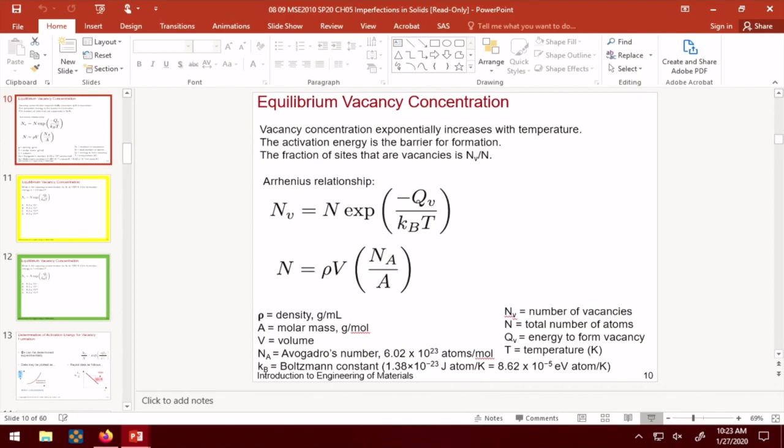All right. Will the pen work today is probably the most unanswered question. But fear not, I brought backup, for I anticipated that there might be a monitor gremlin that refuses. I guess when you passive-aggressively threaten the gremlin enough, it actually does work.

Okay, so we've gone over last time in great detail how to solve for vacancy concentration. Your homework also asks you to actually calculate how many total sites there are. So there will be a tutorial video going up on how to actually calculate the total number of sites. There's also been a tutorial video posted regarding how to manipulate the different conversions between atomic percent and weight percent. That's the majority of our discussion today, because when we talk about imperfections, we typically talk about...

Depending on which scenario you're in, if you're mixing the material, we typically report those numbers in weight percent because it's convenient, right? How much phosphorus should I add into silicon to make this microchip work? It's much easier to have somebody just weigh it out. Stoichiometrically, when we're discussing composition, we want to be talking in terms of atomic percent. Is it silicon 0.99, phosphorus 0.01, right? That's atomic percent.

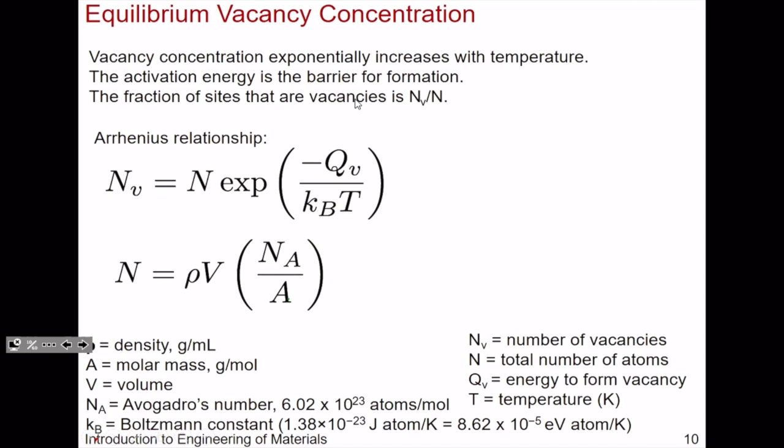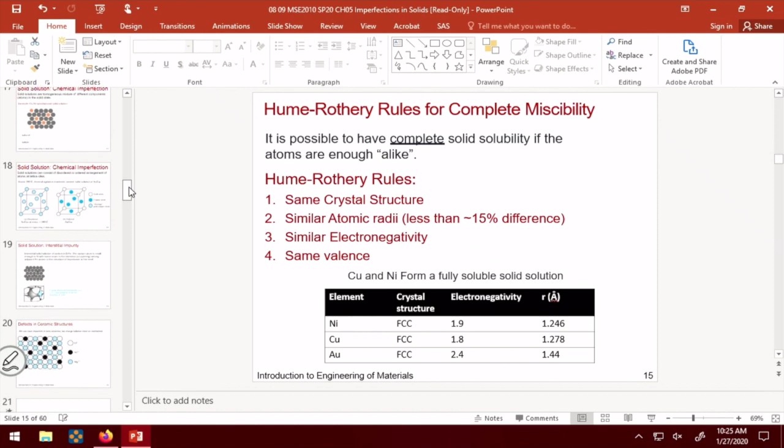So depending on the scenario, we talk about atomic percent when it's convenient for us, or when we're dealing with the actual mixtures physically executing the work, it's more convenient to deal with weight percent. And so chapter 5 deals with that, and there are two equations that just go back and forth. So this is where we left off last time. I want to jump to that before I come back to the Hume-Rothery rules.

We're going to build up to this point where we can go back and forth between talking about weight percent, denoted as C, and atomic percent, denoted as C prime. This may be confusing whether you're talking about C or C prime, but that is the notation. Sometimes I'll write C or C prime, and sometimes I'll just write out weight percent, WT percent, or AT percent. This is what we're going to work up to today.

Then we'll go through a problem about average densities, because when you mix things, inevitably you're going to get some weighted average. We've talked about weighted averages in regards to polymers and how you don't always have the same number of chain lengths in a polymer mixture, right? You always have a distribution. So we've already addressed weighted averages, and now we're going to extend that to talking about molar mass and average densities, which will wrap up our discussion on imperfections in solids.

So let's get us there.

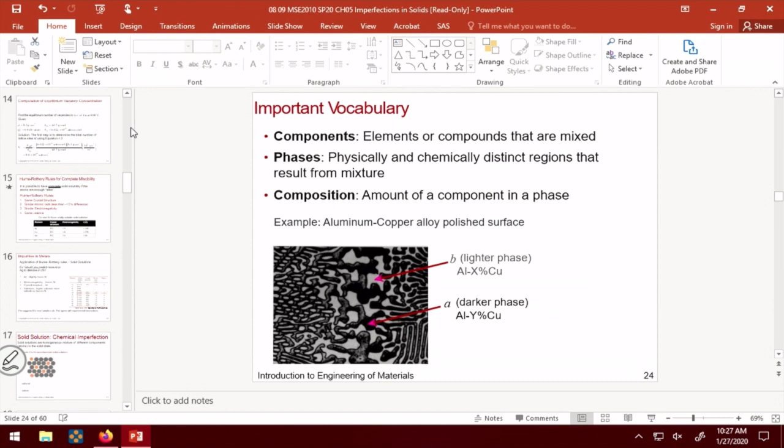The problem we left off with was talking about vacancy concentration in a metal system at 1,000 Kelvin versus at 298 Kelvin—some elevated temperature versus room temperature. We talked about how there could be some ridiculously high concentration of vacancies because it's thermally activated. So at higher temperatures, you're going to have immensely more vacancies than if you were at room temperature.

It's thermally activated—the more energy you put into the system, the more you induce atom hopping. Atoms are now able to vibrate a whole lot more, and they can have enough energy to hop to another site. They can keep on hopping to the point where they hop to the edge of the material, and that can actually expand your lattice constant quite a bit, both due to thermal expansion and due to vacancies being generated.

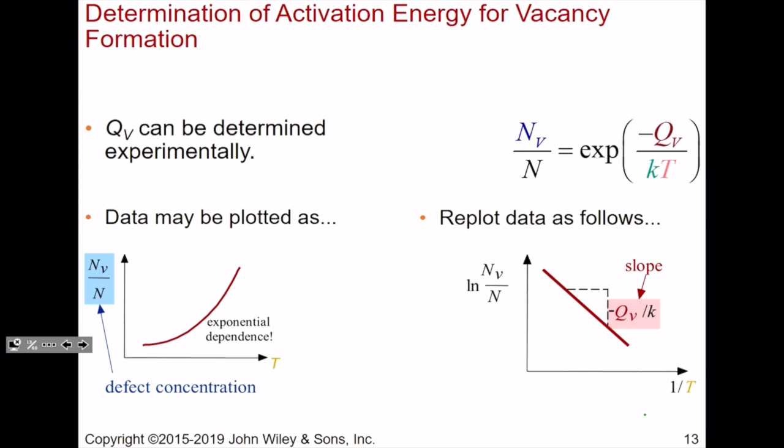So that's where we left off last time—appreciating the thermal activation processes of vacancy formation and the Arrhenius equation, and manipulating the Arrhenius equation.

So then we continue and say, okay, what if we're not dealing with a single component, like the simple examples of just copper or just nickel having a vacancy, or a self-interstitial where you move an atom to a non-crystallographic site? What happens when you have a second component? Sometimes it's an unwanted second component, whether it be a smaller atom or a same-size atom—that's an impurity. Sometimes you want that because you're trying to engineer an alloy with, say, higher yield strength—you're targeting some solid solution.

In everyday nomenclature, we first think of a solution as some liquid form, where you add salt in water, sugar in water. These are the typical solutions we think of, but we can also have solid solutions in which everything is in the solid form. So when you have mixtures of, say, copper atoms and nickel atoms, those will form a solid solution.

You can mix in a little bit of powder of nickel, a little bit of powder of copper, or two ingots, increase the temperature, and melt it all together. But how can you predict if something will form a solid solution?

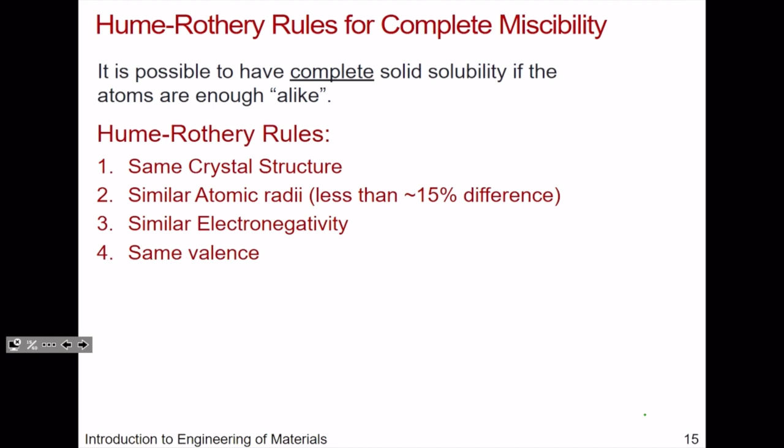Think about a chair, right? If you're wanting to occupy some space, and you're trying to put some radii that's much bigger than the space that you have, that's going to be more difficult, right? So these are the guiding principles that will work for most solid solutions. Of course, we're not going to throw you a curveball and say something that obviously does not satisfy these rules and expect you to know them, right? So keep that in mind. There are always exceptions to the rules, but we'll talk about the cases that do work to begin with.

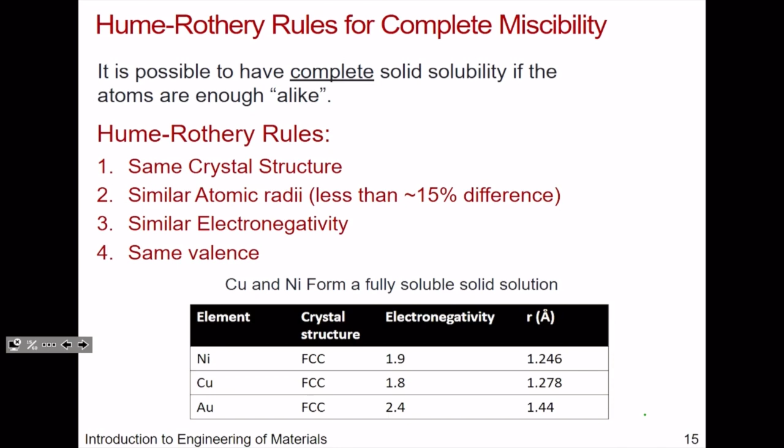Okay, so this was the example, nickel and copper. If you think about copper and gold, they do form, but in different stoichiometries than, say, 1:1. We'll go into an example in the next slide regarding that. The electronegativity between copper and gold, say 1.8 and 2.4, similar, but obviously less similar than that of nickel. So nickel is going to more readily go into a matrix of copper than, say, gold would. But that's not to say that gold-copper solid solution couldn't form, and it actually does.

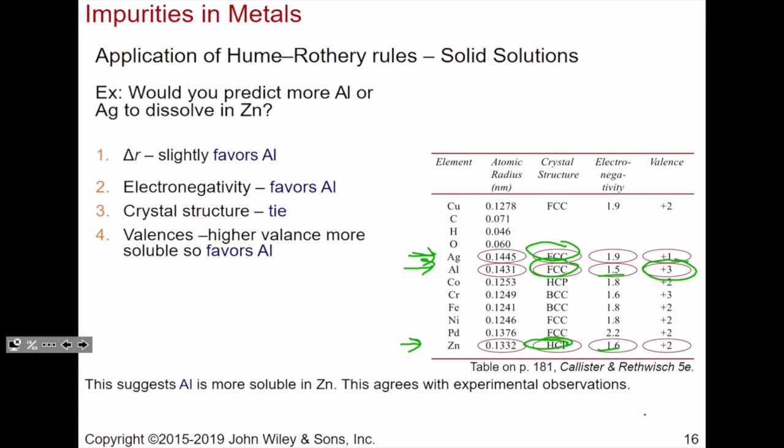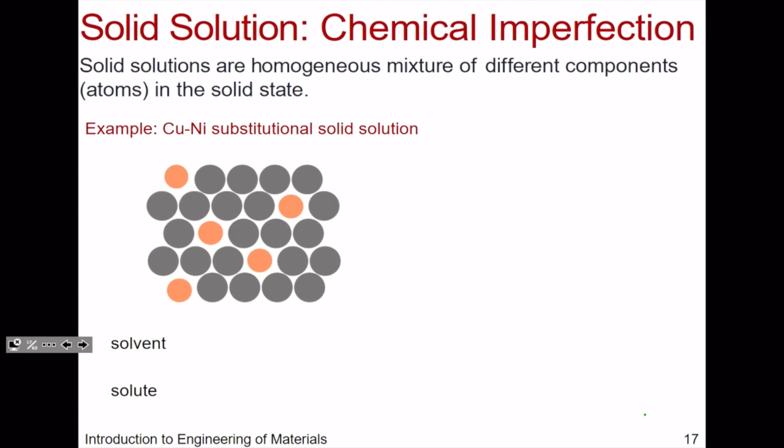I've also talked about gold and copper, and depending on the temperature, it can form what's called a disordered system where you have an average position. Could copper sit here, or could gold sit at the equivalent site? We don't know—it mixes around, so it doesn't matter. From one unit cell to the next, it could change a little bit. So the average position is that a quarter of your sites are gold, and three out of four are copper.

That's what's called a disordered system, where there's an average site and no preference as to which site it occupies. Below a certain temperature, for this particular system, you have what's called an ordered phase—meaning there are actually preferred crystallographic sites. Below 390 C, copper prefers to be at the faces, and gold prefers to be at the corners in this particular system. Now, if you shift it all, it's still equivalent, but that just means if one is at the faces, it's always at the faces, and if one is at the corners, it's always at the corners—they're interchangeable. But there's a preferred site, and that's what we mean by an ordered system.

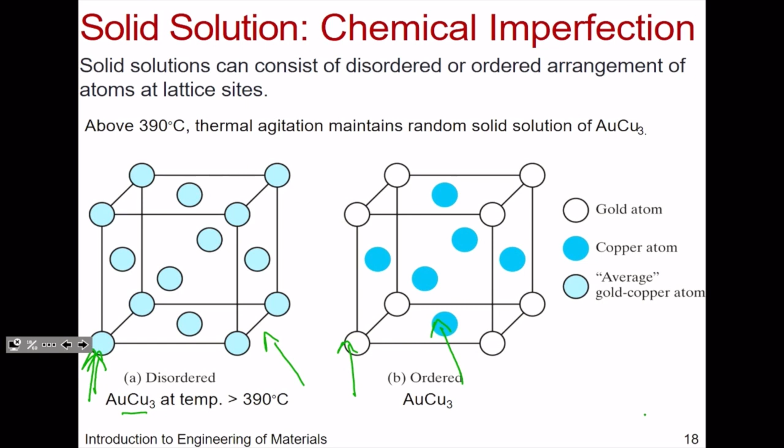There are more atoms in terms of the number once you add up the fractions? So if copper is at the faces, what's the equivalent volume of an atom at a face? Okay, so you got it. You're not just counting atoms, you're counting fractional occupancy, so you do the math again. Okay, glad I cleared that up in case you were confused.

Okay, so let's go to interstitials. This is a beloved system by every material scientist because this dictated the Industrial Revolution. For many years, if you went through a material science class, you'd just be given the iron-carbon phase diagram, and for 50 minutes you'd draw every single phase from memory at every single composition. Because this material dictated industry—a lot of materials are built with steel. There are entire classes dedicated to steel; we're only going to have four lectures on it. But why is it important?

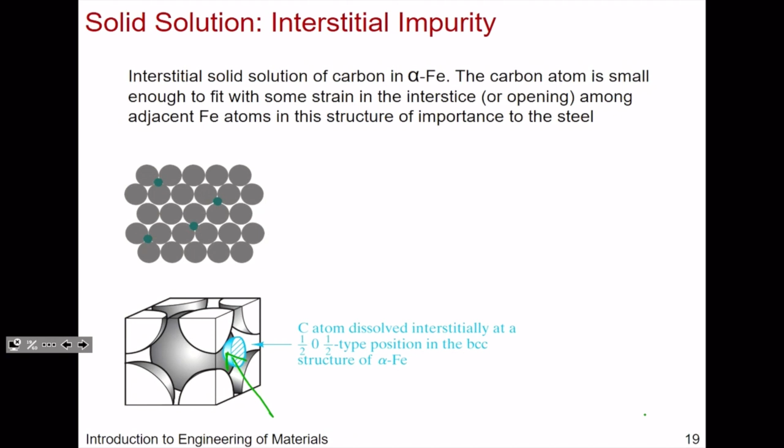It's important because you can put a carbon atom into the interstitial, and this absolutely dictates mechanical properties, corrosion resistance, chemical stability, all of that. Over the years we've learned if we add chromium, we get stainless steel, which has higher corrosion resistance than regular steel. We give up maybe a little strength in some areas, but corrosion resistance is more important sometimes. So the interstitial, even though it's a tiny atom, absolutely changes the landscape in terms of mechanical properties.

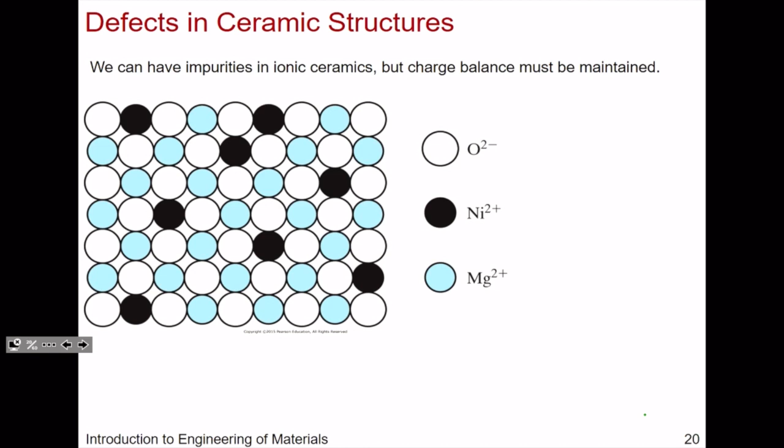Okay, we talked a lot about metals—let's talk about ceramics. Can we put a cation to substitute another cation? Yes. Similarly, can we substitute an anion with another anion? Also yes. Here's an example of magnesium oxide with some nickel 2+ in place of where magnesium was. Fine—you've achieved what's called electroneutrality, meaning you have not changed the charge balance. This is important because everything adds up to zero, and all is dandy.

When things are not neutral, it looks something like this. So if you have sodium chloride, your cation is 1+, your anion is 1-.

In the PDF that was uploaded, it was missing an extra half plane, so please add the extra atoms in there. If you count all the charges, sodium is in blue, chloride is in green. Let's count: sodium should be 1 through 9, and chlorides is also 1 through 9.

Charge neutrality. This is just a projection of one of the planes of sodium chloride.

Now let's say you want to put in a calcium 2+, an aliovalent substitution, meaning a different charge. You now have to remove one sodium atom out of the system in addition to putting in a calcium 2+ to maintain electroneutrality. Here I'm drawing a dashed line where a sodium atom was. If you count again, you're still ending up with +9, and the chlorides are obviously -9 because I haven't done anything with the chlorides.

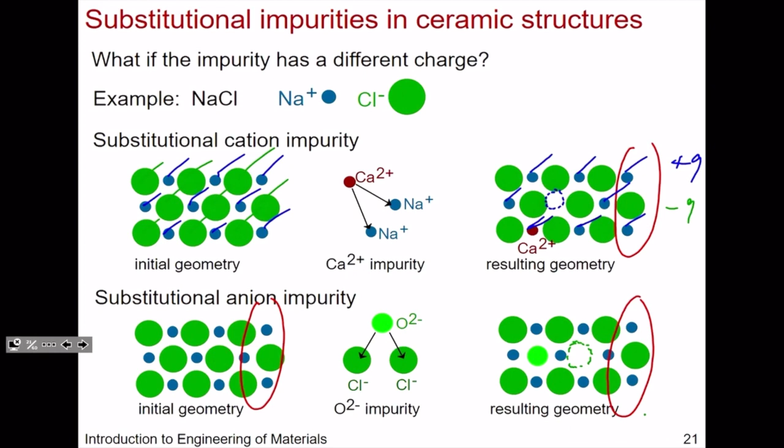There are specific names for when we get these pairs. So let's say you take away a cation vacancy and there's also an anion vacancy—we observe a cation vacancy and an anion vacancy together. We have a specific name for that: we call it a Schottky defect instead of just a defect.

They come in pairs. Or if the cation—let's say it was blue here—I'm going to draw a dashed circle. Let's say it moved to one of these interstitial sites. If it moved to an interstitial site, we call that a Frenkel defect. So you see a vacancy and then an interstitial because it moved somewhere else in the structure. That's a Frenkel defect.

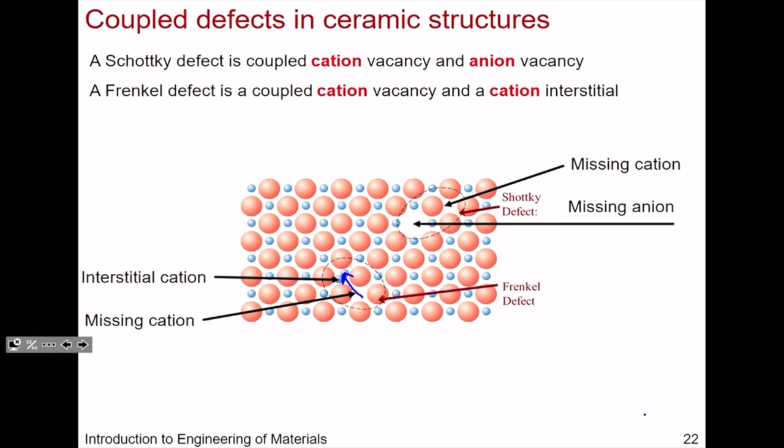So if you just have a vacancy, then you just have a vacancy. But if you have these specific pairs, this is where you use these particular name systems.

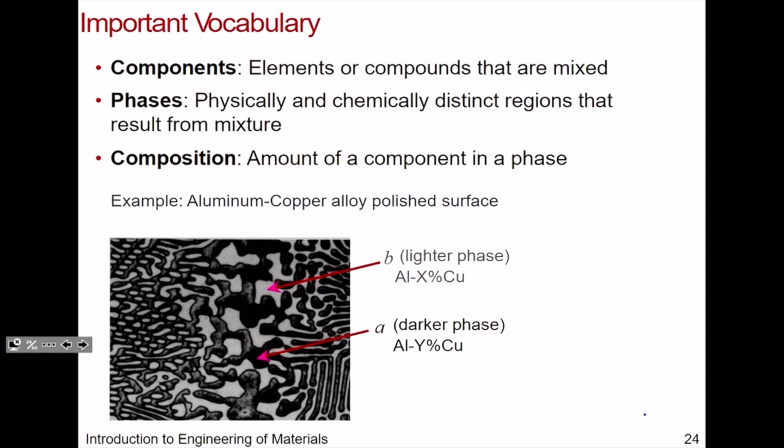When we want to talk about weight versus atomic percent: for weight percent, we're talking about the mass of some element in the whole system. So if I have 5% beryllium, weight percent beryllium, that means in 100 grams I have 5 grams of beryllium in there. That's weight percent. Atomic percent is different.

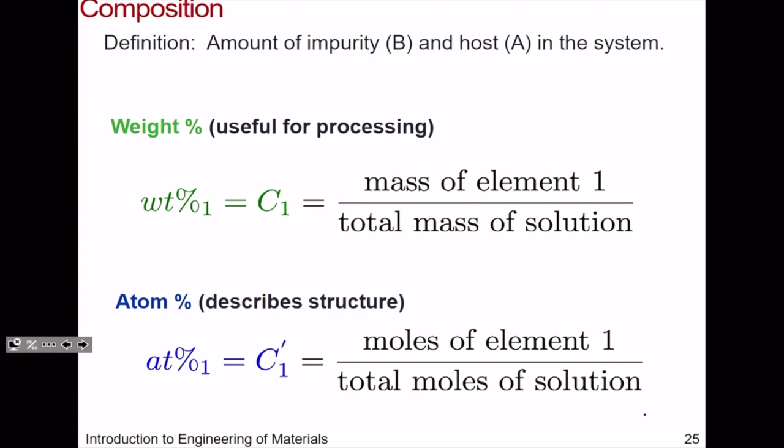I've talked about composition, and you can go back and forth with this relationship. This is worked out and derived in your last lecture slide for this slide deck, and it's also worked out in one of the examples in your textbook. There are two different approaches to it, but both derivations get you to the same answer—these two relationships.

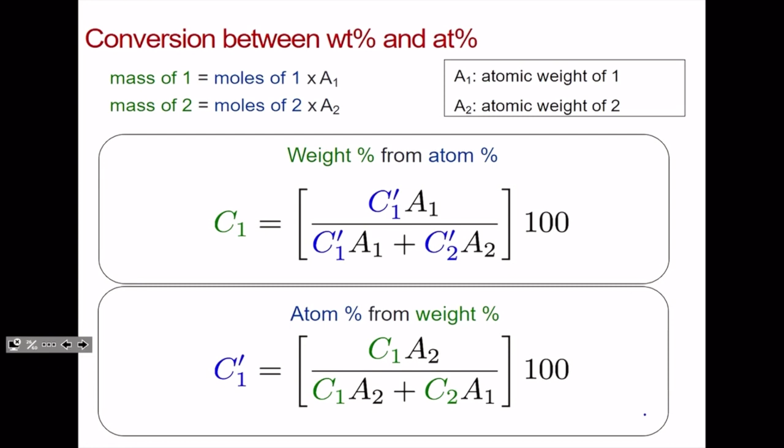Okay, so if we know the mass of one component, we're talking about a two-component system. If you have three components, then you just add on the number of components you have, and you manipulate the equation for the number of components that are in your system.

And so we can manipulate that with this example. I worked out this example ahead so we can get to a more complex example later on, because I think it's simple enough that you can work on it in your own time without much in-class explanation. Let's say you have a system where you're trying to weigh out 5 weight percent of beryllium and 95 weight percent of copper, okay?

So how do you convert between weight percent and atomic percent? Well, you can use a relationship where you put in the weight percent, and here we've deemed that beryllium is component 1. So this is your C1, which is 5 weight percent beryllium. Just be consistent. Whatever you call 1, be consistent. Whatever you call 2, be consistent. You can switch it around if you want. If you want beryllium to be 2, fine, but just be consistent.

So then if we say C1 is 5 weight percent beryllium, we also are given its molar mass here. A2 is the molar mass of copper, so we're given that: 63.55 grams per mole.

And so when you put in the numbers and calculate it, you get something on the order of, let's say, 27 atomic percent. So you can see that the beryllium weight percent is only 5, but the atomic percent is significantly higher than that. This is just to demonstrate that obviously the two numbers are not the same, because that's dependent on the molar mass of the system.

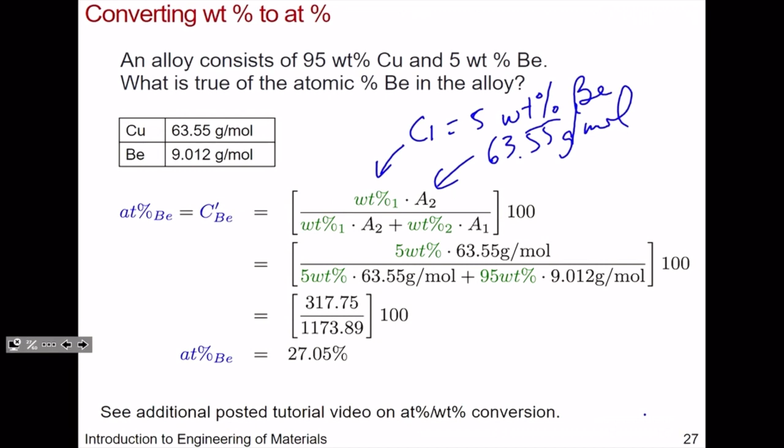Quantitatively, I'll reserve the last little bit, I think. Well, actually, do I want to do that? Let me switch over and do the problem before we go on from point defects to line defects.

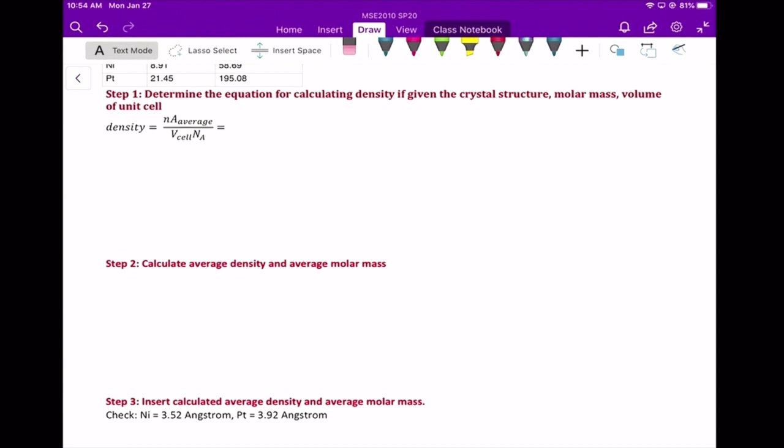I've posted something similar on the tutorial video, but let's say, because my handwriting gets very big very fast, I've decided that we're going to scroll, and I will not be confined to a PowerPoint slide. So we're going to do it through here instead.

All right, so let's say, can everybody see that okay back there? Okay, so in this particular example, you have an alloy that's platinum. As I mentioned, it's used in catalytic converters. It's a very expensive element. So what people typically do is add in some base metal that is cheaper, but you pay a price in terms of performance. How much performance can you give up versus paying a huge premium for using platinum?

So people add in nickel. Sometimes they'll add in copper. They've added in other base elements to do testing for catalysis. So now that you've incorporated nickel, you've incorporated 20 weight percent. Clearly your unit cell, the lattice parameter for nickel is obviously different than the lattice parameter of platinum, right? And so you're given that here.

You're given the different densities of nickel and platinum, and you're also given the molar masses of nickel and platinum. You can look these up, but they're provided for convenience. They both have FCC crystal structure. The question is: what is the unit cell edge length for an alloy where there's 20 weight% nickel? For a two-component system, platinum is the balance, which is 80 weight%. Okay, let's do that.

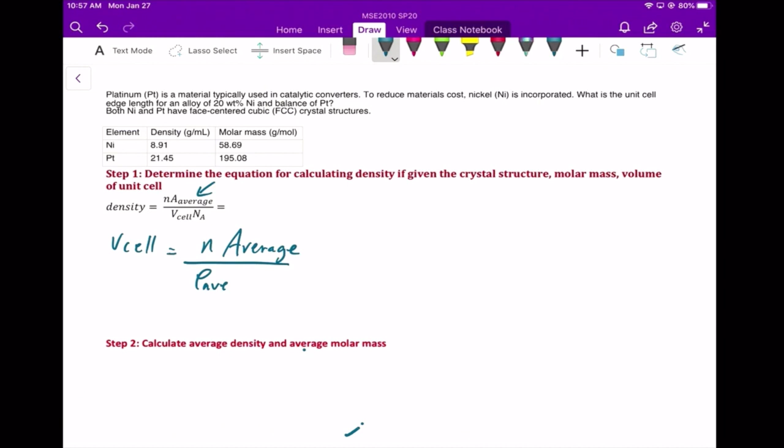We also have to determine, since we're solving for A, we can rewrite this as V cell, the volume of the unit cell, equals the number of atoms in that unit cell times the average molar mass we have to solve for, divided by the density, but the density is just the average density of this 20 weight% nickel-platinum alloy, times Avogadro's number. So it's clear we don't know two things: we're solving for V cell because it contains our lattice parameter, the unit cell edge length, and we don't know A average and rho average. That's what we're going to solve for. That would be step 2.

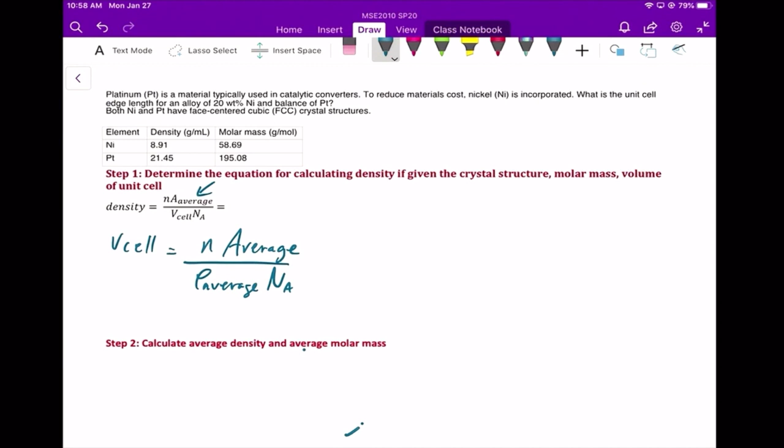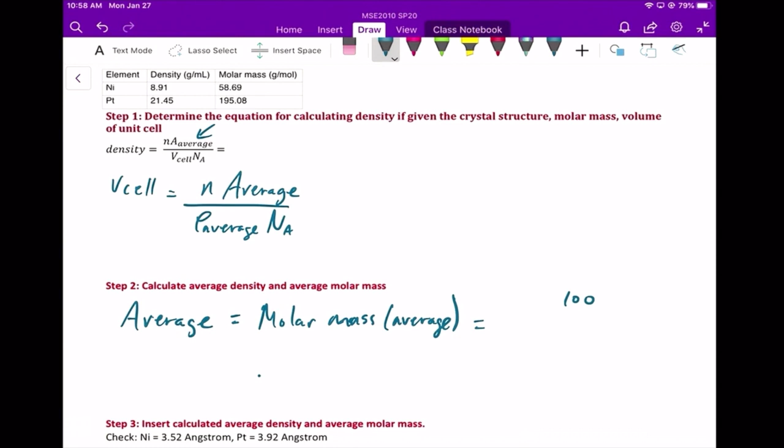Let me rearrange and clean this up. We know that if we're given the weight percents, we can calculate the average molar mass. This is just the molar mass average. We know that we can take the weight percent of nickel divided by the molar mass of nickel, plus the weight percent of platinum divided by the molar mass of platinum, which we're given. This is an equation in your book, right after equation 5.13.

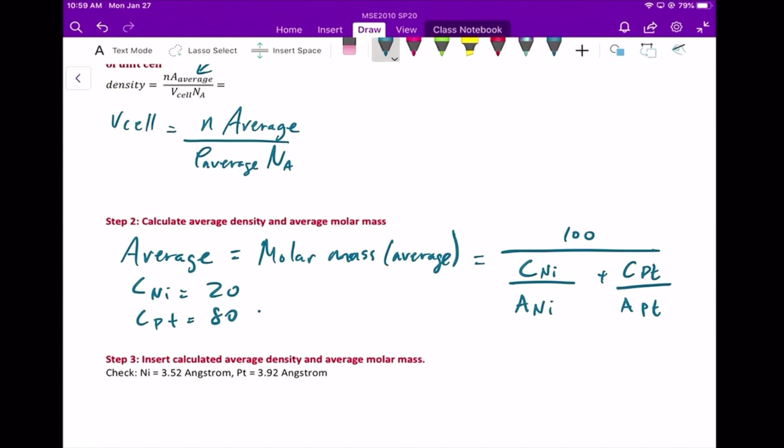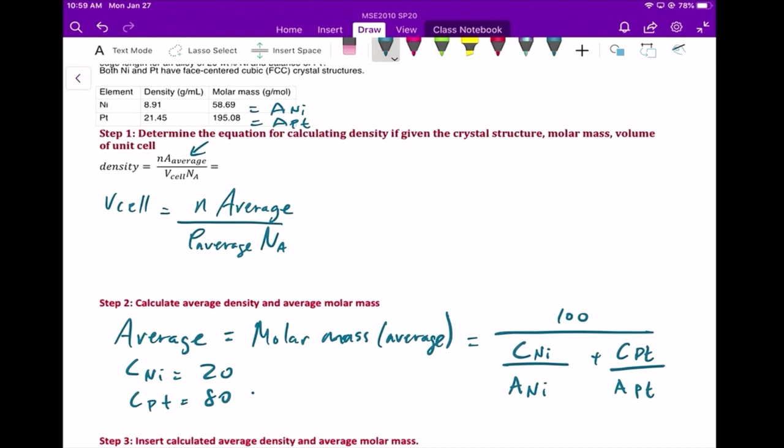We can plug that in where C-Ni is 20 weight percent and C-Pt is 80. A-Ni is already given, this value here, and this is A-Pt. Okay, so if we do that, we get this result. I just plugged in the numbers we talked about. For the sake of time, I'm not going to crank out these numbers, you can do that as an exercise.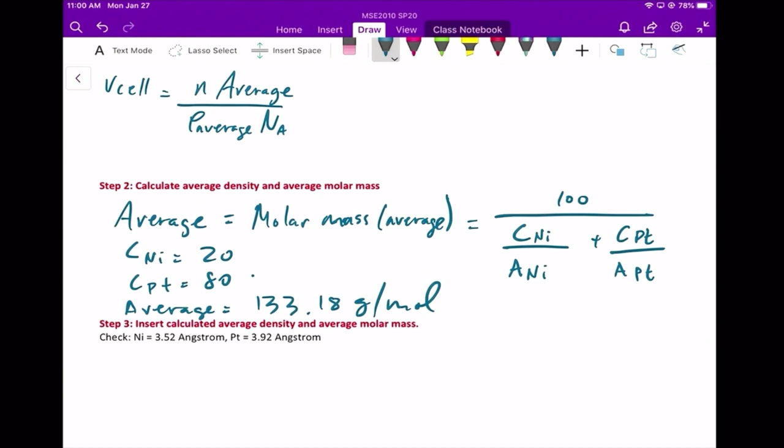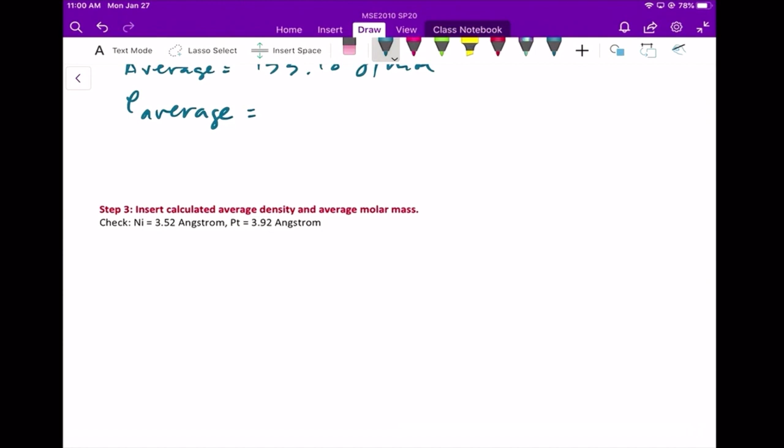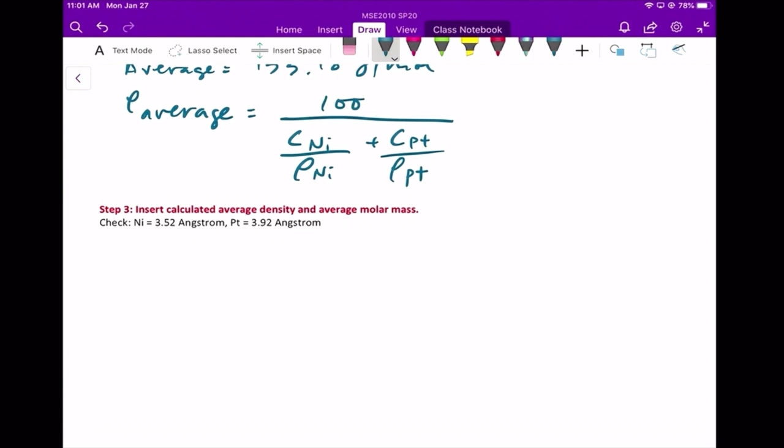Let me go into text mode, I need more space. Okay, let's go back. Now we have to calculate the average density of an alloy that has 20 weight percent nickel and 80 weight percent platinum. That's the density, and we know the average density is given as: C-Ni is once again 20 weight percent, C-Pt is 80, and you're given the densities of nickel and platinum. Let me scroll. This is just the rho of nickel, and this is just the rho of platinum.

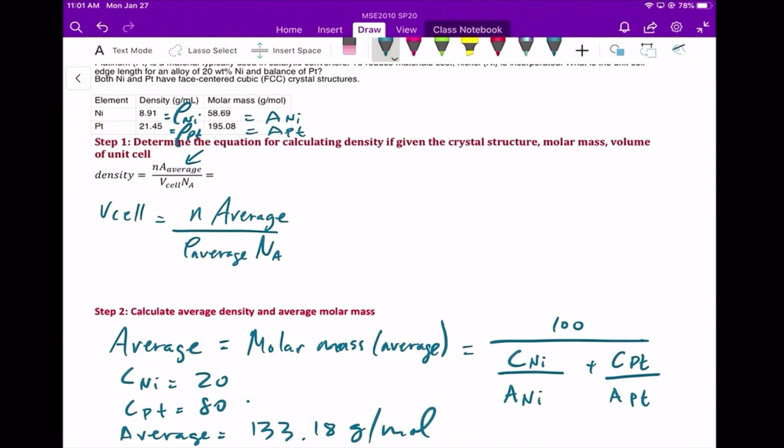So if you plug that in, you get something. This is 100 and... 21.45. So this will give you something like 16.74 grams per milliliter, or cubic centimeters, same thing.

Let's look at this number, 16.74. Does it physically make sense? Well, you have mostly platinum, and platinum's density is 21.45 on its own as a single component. If you have mostly that, the result should be somewhat closer to that number, just intuitively speaking, and 16.74 is a little closer to 21.45. So just having that sense of a physical sanity check, does this make sense, before I go on.

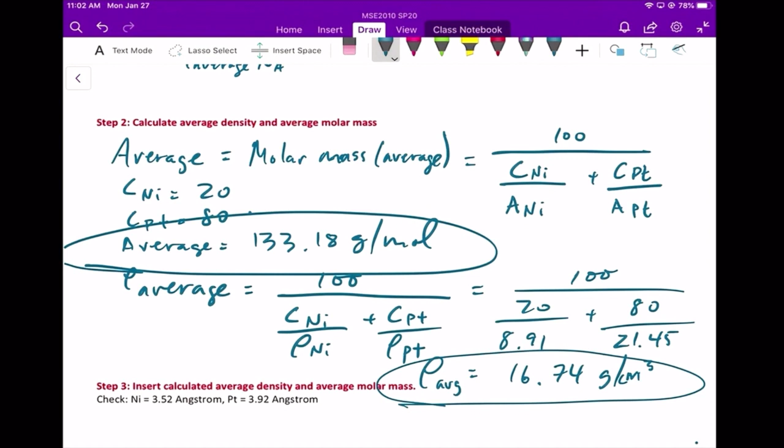That's one way you can do it, okay? So now we figured out this value that we didn't know before, and the weighted average that we didn't know before. So let's go back and revisit our equation that we were trying to solve for V cell. It's in step 3, but I'm going to go back up to step 1 because it's already written there, to contain the work.

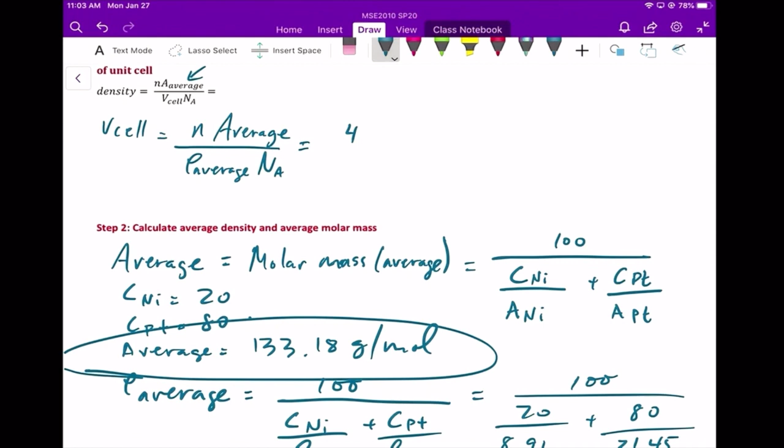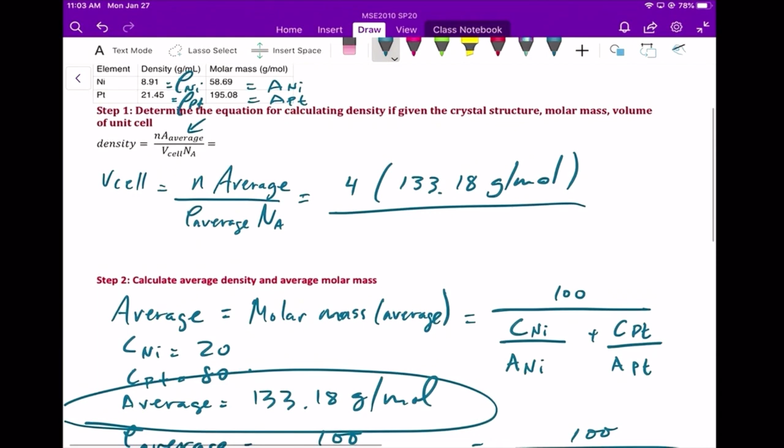So we know in FCC there are 4 atoms per unit cell. We counted this through together, right? So there are 4 atoms per unit cell in FCC. Our average molar mass is 133.18 grams per mole. Our density is 16.74 grams per centimeters cubed, times Avogadro's number.

If we put in all the units, it would look something like that. But that just tells us that this is all equal to A cubed, right? The volume of a unit cell for a cubic system is just a cube, and we want to know what A is, because A is the unit cell edge length.

So if we cube root this, we get A is... okay.

Remember, you also need to convert from centimeters to what's more commonly reported for lattice parameters, which is nanometers and angstroms. I'll leave that exercise to you to do that unit conversion, but that should be it.

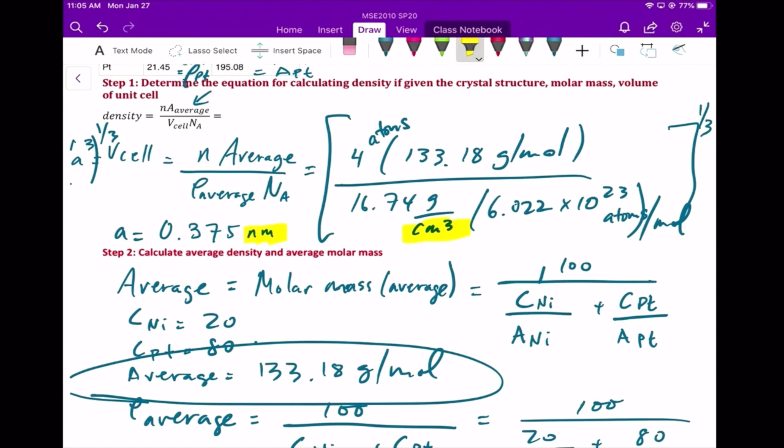Any questions so far? You could also do a sanity check. You say, okay, well, nickel is tabulated at 3.52 angstrom, and this answer comes out to 3.75 angstrom. So if it's 3.75 angstrom and platinum is 3.92, it's somewhere in between the two.

That's good, that's a physical check of whether or not your answer even makes sense. Because if your alloy is some mixture of two components, it should average out to something in between the two end members, right? So if you got something like 4 or 2 angstrom, you'd know you're in trouble because it's nowhere near or in between your two end members. Nickel is smaller, platinum is bigger, so mixing them together, you get some average that's in the middle, somewhere in between, not exactly the middle, but somewhere in between. So it's a good sanity check, does this number even make sense?

Any questions about this example so far? It may or may not help you with your homework.

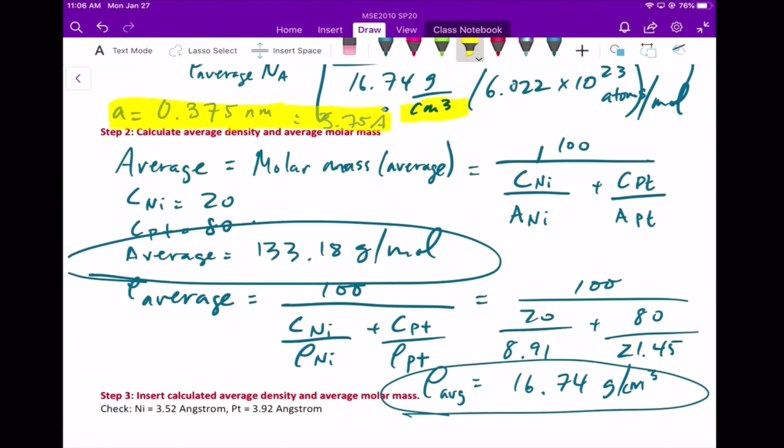Okay, no answers. We're going to switch back to talking about steps of dislocations. We talked a lot about point defects. You can have vacancies, you can have self-interstitials, you can have Schottky defects, Frenkel defects. What happens when it starts propagating in a line? Well, we call that a dislocation.

And if it's on the edge, as you see here, it's a little bit difficult to see, but it's coming out of the board. So what's happening is in this particular system, you have atoms going this way, and then all of a sudden you have an extra half plane here, but that doesn't propagate to here. So there's just an injection of a whole plane of atoms, and that's your dislocation, that's your defect. The way we describe that defect in this particular instance is an edge dislocation, or an edge dislocation line, and we draw that as this symbol.

So whenever you see this perpendicular sign, you know somebody's trying to indicate that there's a dislocation, and it represents that extra half plane. This part of it, as you can see here, is coming in and out of the page or in and out of the board, and your dislocation is here. Hence the perpendicular line, that's where your half plane ends. It doesn't propagate beyond that line.

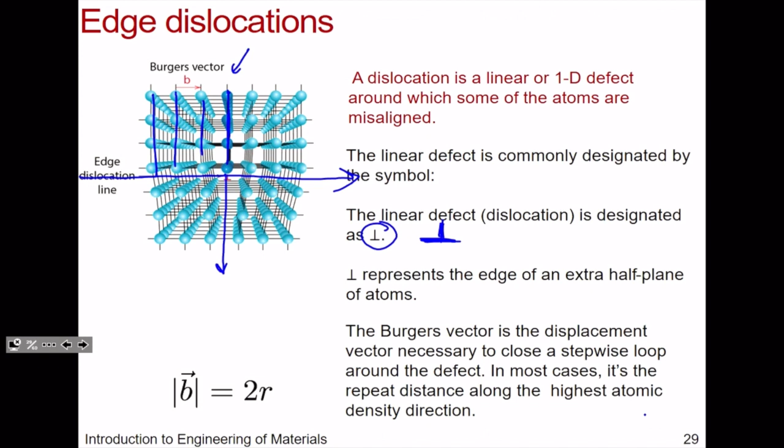Okay, what do we do with this information? Well, you see this quite a bit, and how do we describe it to another person? You see this quite a bit in metal systems actually. The way we describe the dislocation is with what's called a Burgers vector, and it's equal to 2r, r being your atomic radius. Because what you're saying is it's off by that half plane, and that half plane is occupied by these atoms. So here you see that half plane here.

So that's where it would be if you could actually see through all the planes. And so what you're trying to say is, if I go around my normal lattice, I don't end up where I should end up because I have this dislocation.

So the easiest way to do that is to pick a point to start and say, okay, if my system were perfect, right? If it were perfect, let's say if I start here where it is perfect, there's no extra half plane just yet. If I go 3 in this direction, and then 3 in this direction, and then 3 in this direction, and 3 in this, if I go equivalently to the right as I do to the left and down versus up, I get to where I was, right?

So it's just completing the circuit. Like, am I crystallographically equivalent? The answer is yes, because you can traverse in equal amounts of unit cells and you get back to where you were.

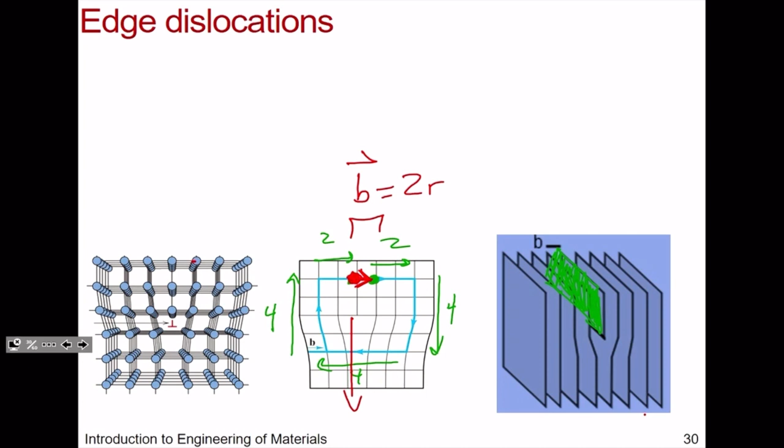And that's your Burgers vector, this. That is your Burgers vector. That's how we indicate there's a half plane there. There's a plane there that's missing, or that's missing beyond here. So this line that you see is actually a whole plane coming in and out. So it's not one atom that you're missing. Now it's a whole plane of atoms that you're missing. That's what the Burgers vector is telling you. So that's one example if you just have a simple line dislocation, just one plane coming in and out.

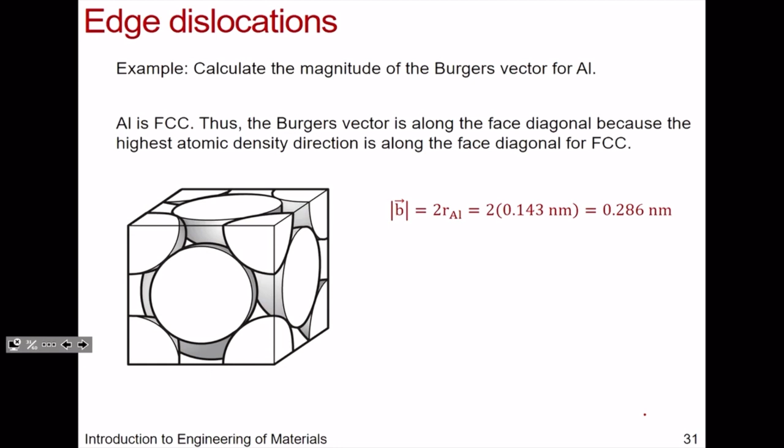Obviously, they're going to have— one moment. For the interest of time, I'll skip that example. But it basically just calculates your 2R for a specific system, that system being aluminum.

But let's say you have now a screw dislocation. So what can happen is you have an extra half plane, but it goes like this, sort of like one of those parking structures or whatever slinky that you can think about, right? It starts on one plane and it ends on another plane. Your dislocation just keeps on going. That's another type of dislocation.

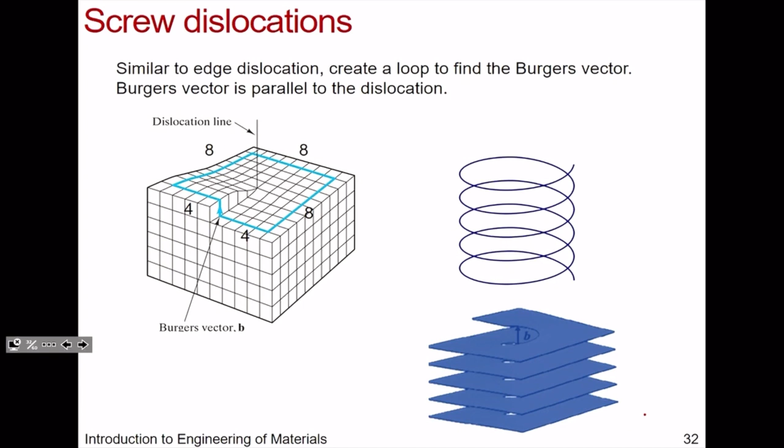We won't go into it too much, mainly because there's enough to do with edge dislocation and also point defects, but I just wanted to point it out to you because if you're working in metallurgy, your microstructure and your mechanical properties will be affected when you have these screw dislocations. And you'll see that when you do microscopy and imaging. Okay, so these are just different renderings of edge and screw dislocation.

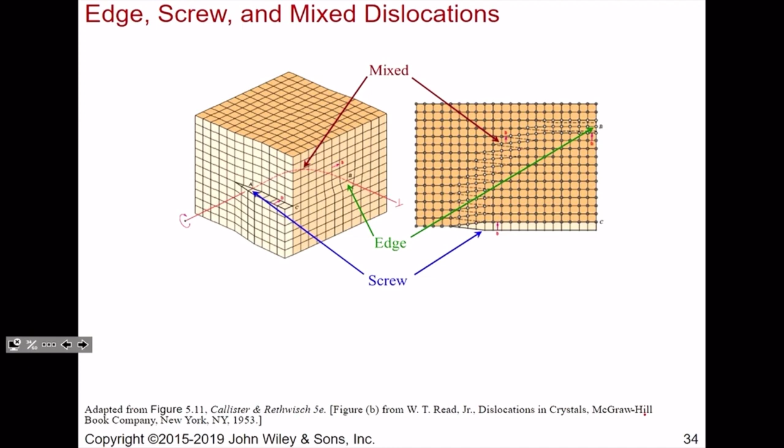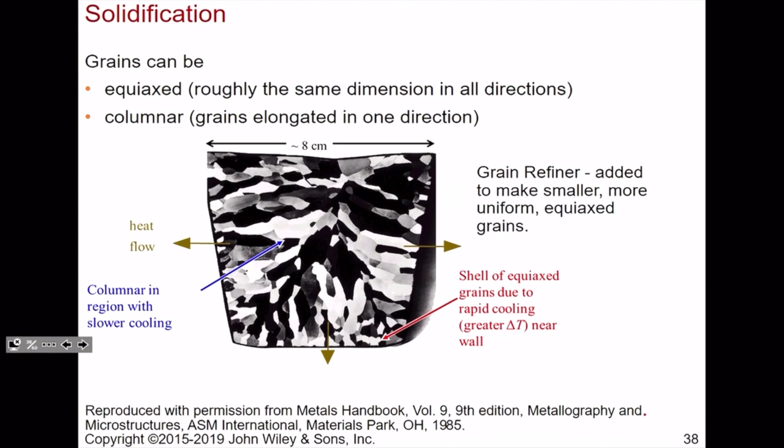Let me get to area defects. What you typically see and the materials you'll typically work with have these grains, right? So you could see here that in this particular material, these are grains, and they are touching each other. They're right next to each other like this. And so what you have is actually these grain boundaries where there's a lot of atomic mismatch, right?

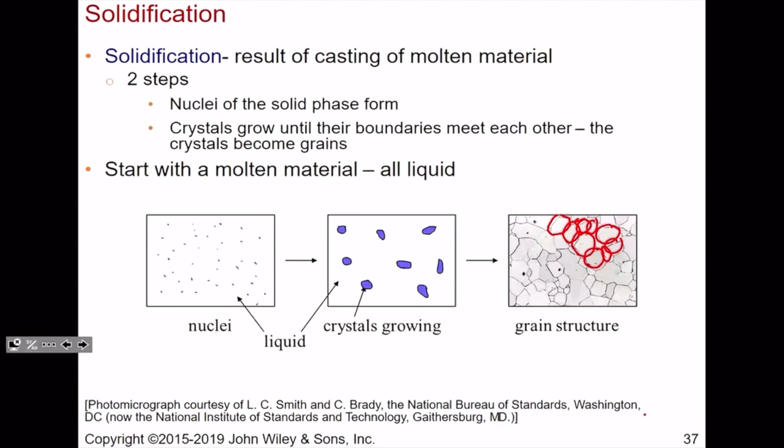So it's not just one atom that's missing or a whole, a line that's now off from the crystallographic structure. It's a whole area that's off. And that's actually the real world. That's the material that you deal with every day.

And that's okay, because in real world systems, right, you have these grains and you have polycrystalline materials because that's just how materials are made. And so unless you're carrying out some single crystal synthesis like Intel, where they grow extremely large ingots because they'll source silicon from a very particular beach that has low impurity sand, and then they ship it over to Portland and do whatever it is that they do to it to grow these beautiful large ingots that they can slice into their silicon wafers. This is what you mostly have, right? You have these misalignment of atoms.

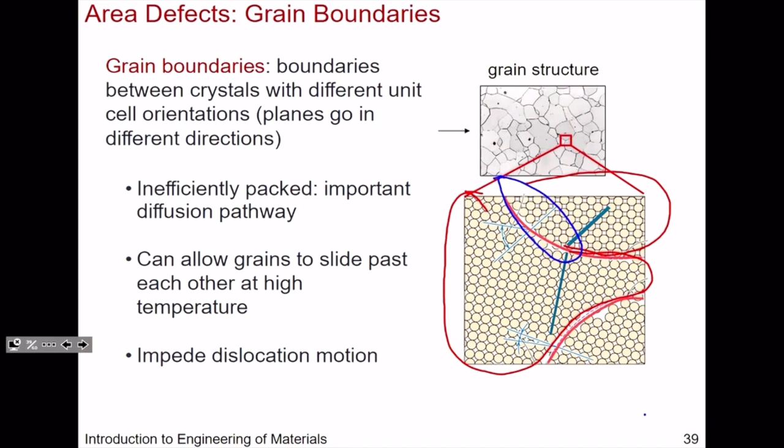And then you can calculate and quantify the grain size. And so given the time that we don't have, I'll pick up on ASTM grain size number next time, okay?